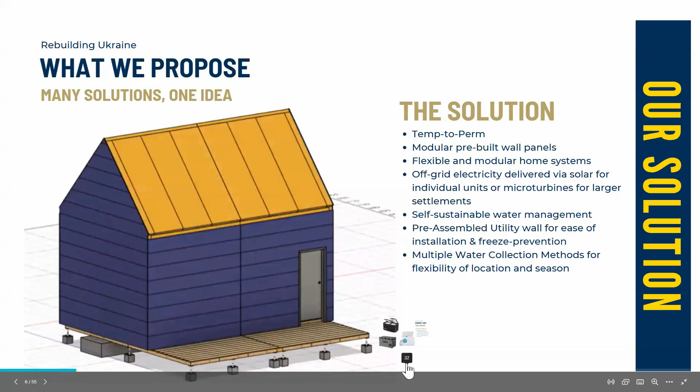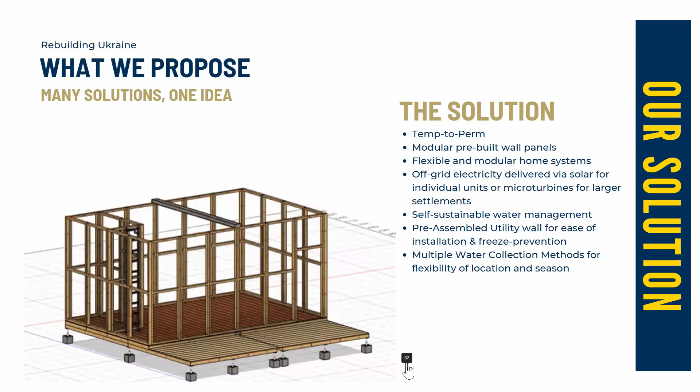My colleagues are going to take you through each of the sections, but this is the solution: something that's temp to perm, modular, pre-built with wall panels, flexible and modular home systems, off-grid electricity, self-sustainable water management, pre-assembled utility, and multiple water collection methods for flexibility of location and season.

So now my colleagues will take you through more detail, starting with Mr. Jeremy at Block Scale. It's an honor to be with you today. As Charlene said, my name is Jeremy Ward. I'm a Master's of City Planning student at Georgia Tech, and I'll be taking you through the block scale plan today.

As Frank has already said, we wanted to imagine what it would be like. We're presenting a template for a unit for Ukraine, but we wanted to imagine what it might be like to reconstruct neighborhoods, villages that might have been destroyed during this conflict, or might be new villages, looking at it from a more comprehensive viewpoint—not just individual housing units, but what the community might look like, how it fits into existing transportation networks, and some of the infrastructure we'll walk you through, including existing development patterns and other recommendations like micro combined heat and power.

As mentioned, these units are individual and self-sustaining, but there are certain efficiencies from clustering that are important to keep in mind in order to make these units cost effective and effective in terms of the social value they provide to the residents of Ukraine. Two of these efficiencies off the bat are the sense of community.

You can have one of these units in the middle of a field somewhere, and that's one of the alternatives we'd like to present, one of the options we'd like Ukrainians to have. But there are communal benefits to being in a village—this is the traditional pattern of human development and growth—and there are benefits from infrastructure. It can be cheaper to run a larger energy and wastewater system for multiple houses as opposed to just one, so we do recognize these efficiencies.

One key takeaway I have for the block scale plan is that one of the optimal configurations, especially for smaller units like the one we have, is a small inward-facing village, a pocket neighborhood. These types of developments are age old—this is the core medieval village pattern in much of Europe—and it's making a resurgence across much of the world, certainly here in the United States, but there have also been pocket neighborhood developments built in urban areas in places as different as Haiti and Hungary, and multiple parts of Africa in the past year.

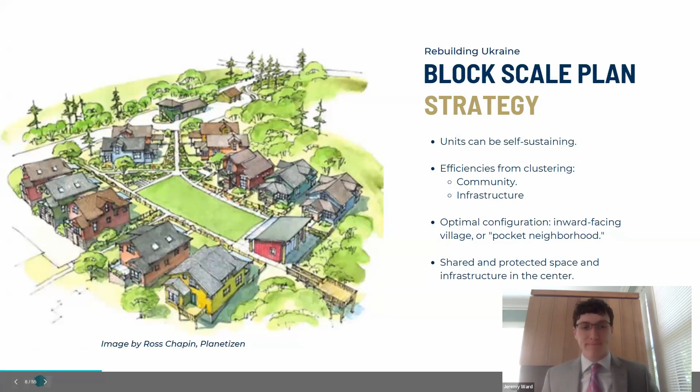However, it's also important for us to consider the existing patterns of development in Ukraine. These are different based on if we're looking at an urban or rural area. This is important to recognize and keep in mind.

One of the key rural patterns of development in Ukraine, in the smaller villages, the outskirts, the agricultural regions of the country, which is much of the country to be honest, is that most Ukrainian villages tend to group along the roadways. You can see in these two images taken from two different parts of Ukraine how the pattern is exactly the same: roads running through the village, houses fronting the road, and some shared space in between the roads, most prominently in the village on the right, where you have four roads and can see fields or gardens in the space between the houses.

So this does, in a way, mimic some of the qualities of pocket development we talked about earlier, having space between houses that can be viewed as more protected. But it's quite different in the sense that it's fronting the road, which can feel less secure, especially in a time of war or trouble. This is something our houses could do, following this traditional pattern if desired on the ground. It could also be slightly modified by putting a second row of units in between two roads, for instance, for people who preferred privacy or were worried about being right on a main road, given there's warfare going on.

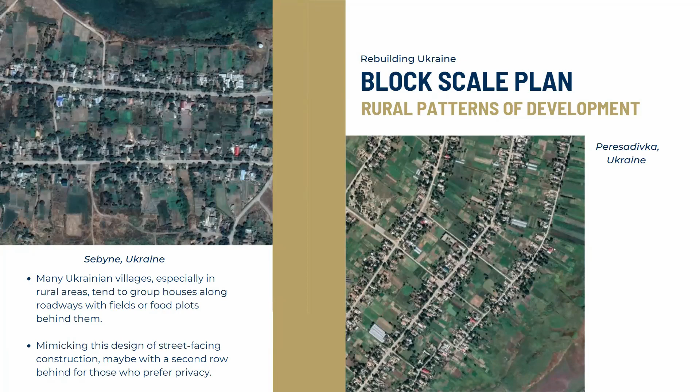So this pocket neighborhood, we would recommend for urban and suburban areas in Ukraine. The beauty of it is it's very versatile. It can work well as infill within an urban environment that may need redevelopment or may have been destroyed, but it can also work as a new neighborhood within a rural area. Based on feedback we've gotten from residents living in these sorts of developments, you can live in it and feel like it's an old place, somewhere with safety, familiarity, and comfort.

Because of the configuration, it has the feelings of protection, shared community space, garden infrastructure in the middle, and the simple fact that you're looking at your neighbors. So there's always eyes on that central area, people are always looking out for your house, you're not isolated. This is a very important consideration, especially given the warfare happening in Ukraine and the impact that takes on people's feelings of community, their opportunity for community.

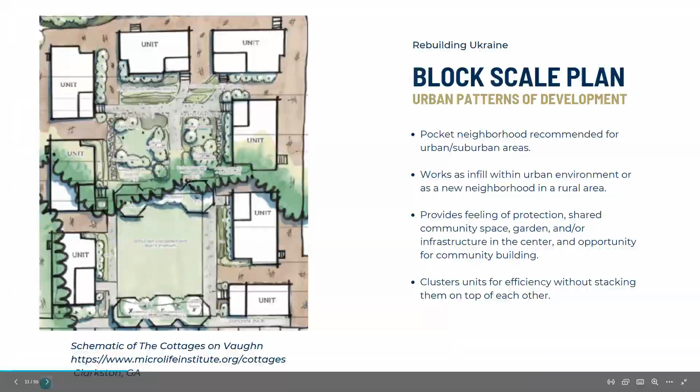Just providing a safe space, whether common or individual, for the cultivation of food near the home, protected from the weather and from people trying to come in. One other key consideration for the project is that these areas in the middle, the greens, are safe areas for children to play. We are not just building these houses for single families of adults or an individual adult, but want to acknowledge that many children and families have been displaced and may make use of these units. So these common areas, under adult supervision, are safe places for children to play.

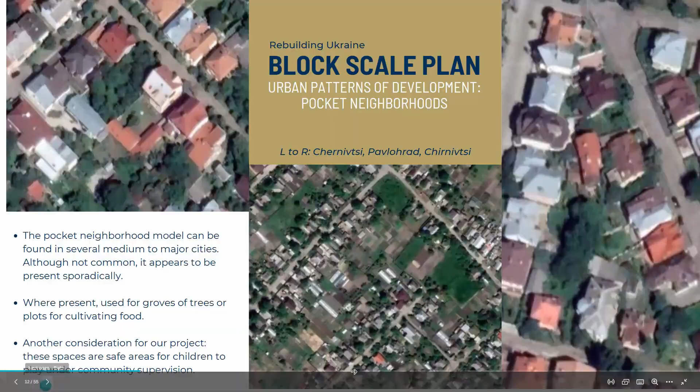And finally, one other key acknowledgement is that many Ukrainian neighborhoods, pretty much around the country, feature fencing in front. This might be for privacy or for security, but if Ukrainians on the ground would like to consider building a larger scale version of a neighborhood with our houses, with our units, it might be worth considering putting in a fence around the outside, because that does seem to be a priority for many Ukrainians.

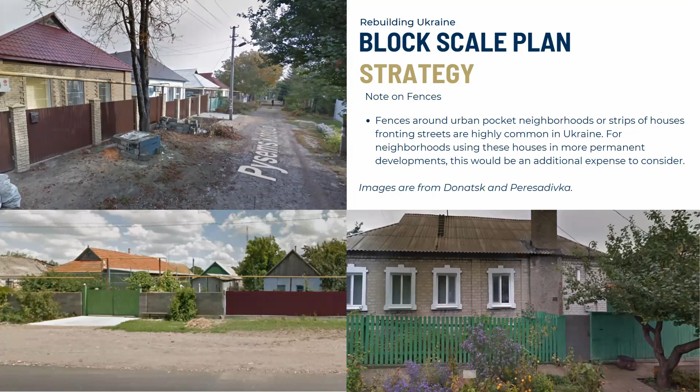I want to say you've really noticed some important things about how Ukrainians like to live, and the whole idea of being able to have gardens for food production. This is very much in the tradition—people who live in large cities all have dachas that they go to in the summer, primarily so they can grow their fruits and vegetables. So I think having that availability is really, really important, and I'm so glad it's part of your plan.

I appreciate that, I agree with you. This has been a priority for people in war-torn areas all over the world. That's a fundamental requirement for human life. We take it for granted here in America, but just the ability, the possibility for families to grow their own food and rely on that—that's a very important tool and a very important psychological feature that can make them feel at home and secure in their new home.

The other thing we've discussed previously is there seems to be a resurgence of people going back to the villages, as opposed to what we saw in the decades when people were going to urban areas for jobs. But now, because of safety issues and others, there's a resurgence of people wanting to go back to the village, so I think this would be very attractive. Thank you very much. Yes, ma'am.

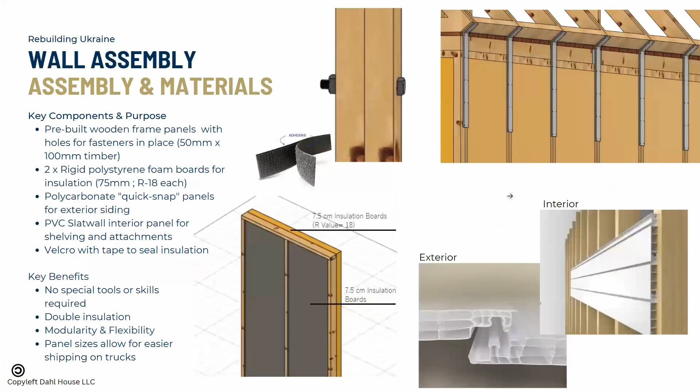The assembly and materials will be wood frame with 2 layers of polystyrene foam boards. Between the foam boards, siding, and interior panels, we're expecting an R value of about 35 to 39, to help combat the really cold winters in Ukraine. The exterior will be polycarbonate quick-snap panels for easy assembly, and the interior will have PVC slat walls, giving people the ability to hang things, covering the entire interior of the system.

The double insulation really helps not just with insulation, but the way they stick together on the outside with tape will also seal it, so it'll be a very tight envelope, which helps with efficiencies in terms of keeping the heat in.

The sizing of all these panels was designed so they could easily fit on the back of a truck, for delivery and moving, making it a lot easier. As you can see on the left, it will be shipped as 2 panels, so you can put the panels together and then put the insulation panels inside, and it'll all attach like that. The key was also scalability.

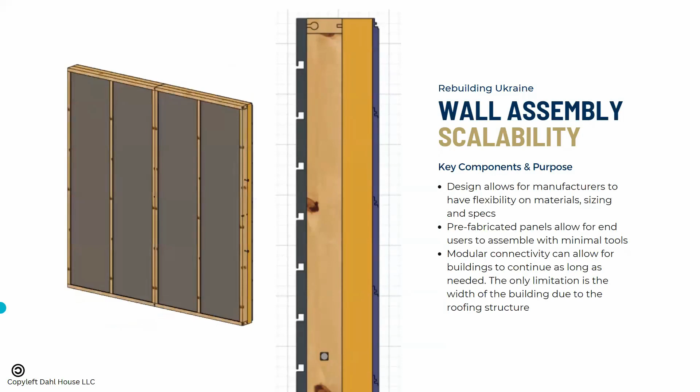The overall dimensions, the standard would be about 2 units, which will be 24 square meters on the main floor, giving you about a 3-meter high ceiling. It's actually a pretty high ceiling in there.

One key thing Vlad mentioned was that they usually have a deck, patio, or balcony where they store all their tools and stuff. He said the deck was basically his garage. So I wanted to make sure we incorporated some kind of deck so they had somewhere for an outdoor area without standing on the dirt.

The deck is about 2 meters wide by 6 meters, giving you a pretty decent amount of space outside. There's also a loft area that gives you about 12 square meters of usable space. So the overall usable space for a double unit would be about 36 square meters.

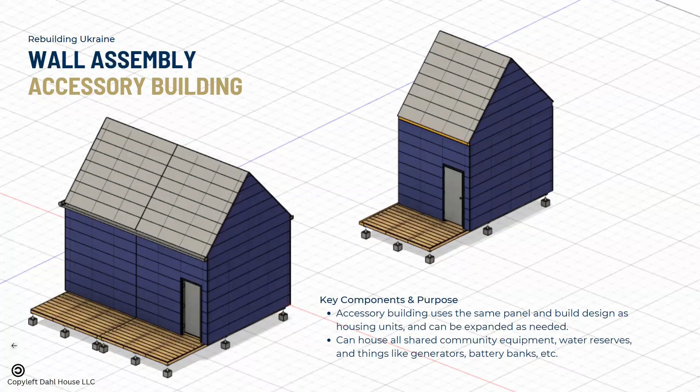As you'll hear later in this presentation, for all the systems we're suggesting, there will be an accessory building or utility building. This building will house things like the MCHP system for power and heat, for water heating. It'll also hold water storage and other utilities like batteries, which they'll discuss the power option for later with Nick and them. The accessory building will use the same design essentially as everything else, so you can make it bigger or smaller depending on whether you're planning a full block's worth of utilities or just a couple units.

So before I pass you off to Jennifer, Art, and Kelson with water and sewer, does anyone have any questions for wall assembly? This is Mike Burek.

I just wanted to point out there was one comment on the last presentation. Peter mentioned to everyone that with the trauma of war growing, growing food can also be very emotionally healing. Yes, I agree, and having that inside, I think, would be a much better feel and make it feel a lot more homey rather than kind of sitting in a box.

Derek, I had just one question. What was the thought on the polystyrene versus polyiso insulation, or something a little denser and higher performance?

It was more for the rigidity, I believe, and just getting basically pre-made rigid panels, because the panels on the exterior are basically a structural component, if you will. So that's kind of why I went in that route.

They look great. It might be helpful to do an example of how they can be reconfigured into almost anything else afterwards, how they can be incorporated into multifamily, or how the reuse doesn't require that they go back together into that same relief housing configuration.

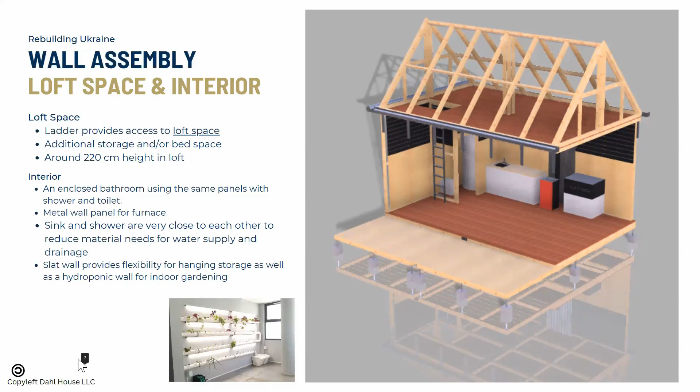Right, yeah, that's a great point. If you can tell, like from the deck, the way that -- if you could go to the slide with the dimensions, you can see it better. So the way the deck is, those panels come out, so you could actually expand the house out to the full length of the deck if needed, and remove the deck. The panel should still attach within that overall dimension. So yeah, there's a lot of modularity to it so they can go a little wider and a little longer.

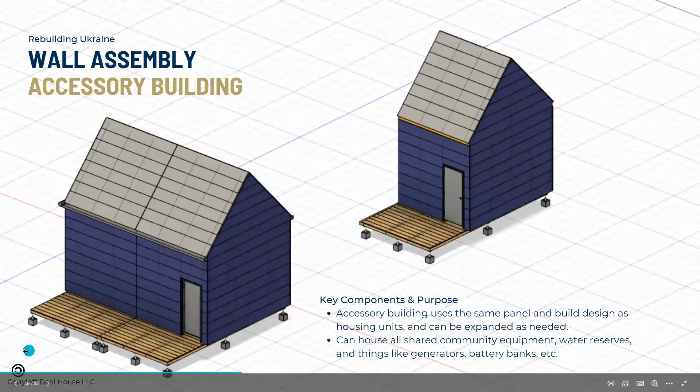Derek, this is Peter Michelson. Quick question about the siding on these units. So the images -- it looks like some kind of lap siding. Is that a fiber cement siding that goes over? No, if you go back to the material slide...

Yeah, right there. It is a polycarbonate, basically a plastic. You can kind of see that one picture on the bottom that shows the exterior, how they snap together. Oh, so those -- okay, I thought those were a vertical alignment. That's a horizontal alignment, yes.

They snap together. And another intent of the wall panels that Derek designed is that they could be assembled by non-skilled labor. So we thought it was important to create a wall assembly -- Derek designed a wall assembly that could be assembled easily. The panels go together quite easily, the siding snaps together quite easily. So it's really meant to be sort of a Lego approach.

So that image up there, Frank, that's like a through bolt that connects panel to panel? Yes, there'll be about 4 bolts per side of each panel, then 3 on the bottom and 3 on the top. So just IKEA tools put it together? Yep, basically you could do the entire house with just a drill and a couple of wrenches.

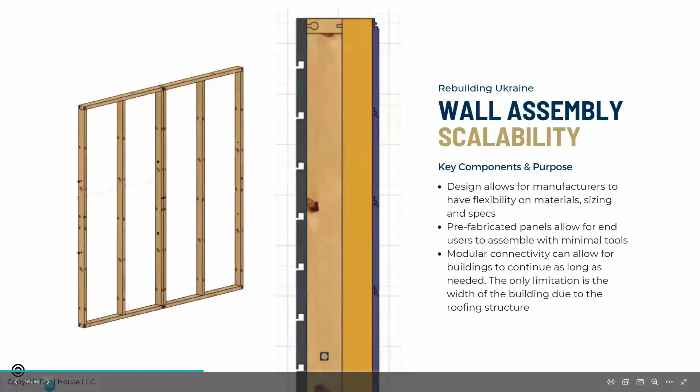Looks like you've got a very interesting eave detail. Also, in one of the other pictures it looked like there was some kind of gutter system incorporated. Yes, there's a gutter system for water collection, I believe it's on the first slide. Yeah, you can kind of see the gutter system goes along the side and meets in the middle.

So the options that will be discussed by Jennifer and her team for water collection will kind of cover where that will end up going. So it'll either end up in a system that's going to be stored there or in one of the accessory buildings.

Would those gutters interfere with ice and snow sliding off in the winter, or I guess you could put some gutter guards on them or something like that? They're actually going to discuss a possible solution for that as well later on, but I believe there's some heating system for the roof. The cool eave detail, I like that.

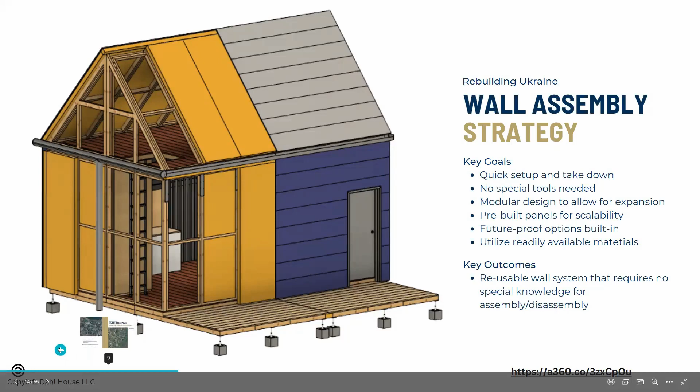Derek, what's the plan for windows? Currently we kind of avoided the window approach for now, just in terms of doing it as quick as possible and having as tight of an envelope as possible. But because it's essentially rigid foam, it would be very simple to just cut through that and add windows as needed.

Yeah, our primary goal, Peter, was heating. And the unit, while it could serve temporary purposes, could evolve as the structure -- it could be disassembled and removed, or windows could be added, it could be clad with brick or stone later. So it serves its purpose and would do so for many years, or it could serve as temporary housing. The concept is temporary to perm, and that's why we considered how these would assemble in terms of community as well.

And for the layman who's assembling it, adding windows is a pretty complex install to make sure the water runs the right way and that there's no leakage. So we're kind of trying to foolproof it. So let me just, I guess, maybe challenge you all.

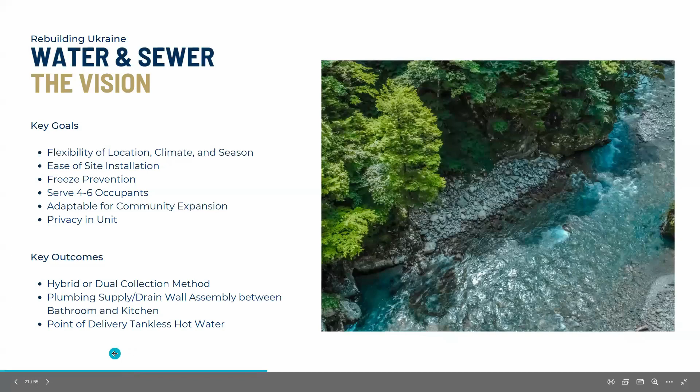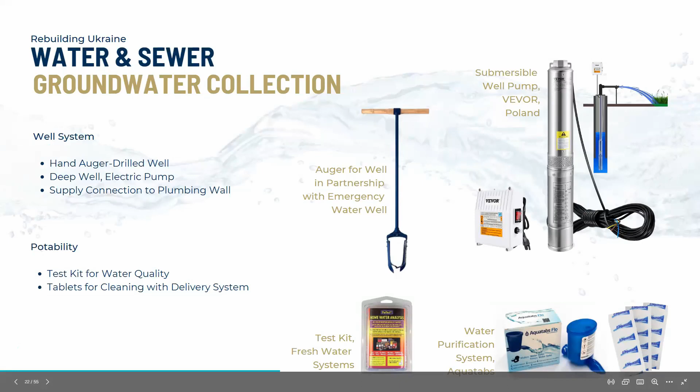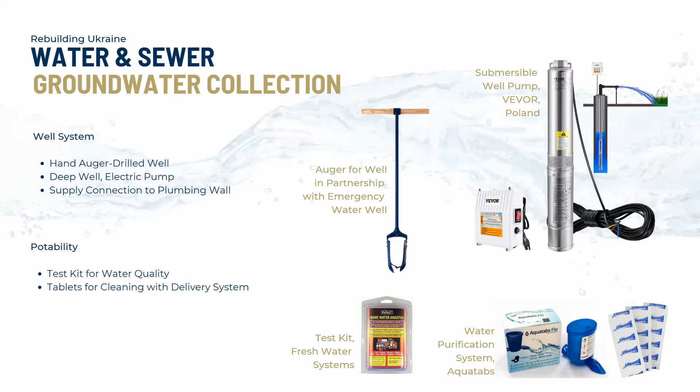And now Jennifer will take us on to the next part of our presentation. Thank you, Art. As we all know, water is a precious resource vital for human survival, especially vital for the survival and prosperity of the people of Ukraine. The ideal scenario would be to connect the cabin unit to a clean municipal water source, as Art mentioned. Our dual hybrid collection method seeks to take advantage of natural resources in a sustainable way for both the individual cabin units and the community at large, with or without the availability of a clean municipal water source.

We focused on creating a temporary to permanent solution for those who are fleeing the war. In our research, we learned that Ukraine is abundant in river basins, so we decided groundwater should be an important component of our water supply solution. We sought to find potential partnerships with subject matter experts, manufacturers, and wholesalers, preferably in the region, for central assembly of the cabin unit, flat packed like Derek mentioned, and crated for site delivery.

So our first goal was to look at the groundwater. We developed a well system using an auger for the well in partnership with the Emergency Water Well. We looked at a deep well electric pump from a wholesaler called VEVOR, that has a warehouse in Poland. And then, as Art mentioned, a quick supply connection to the pre-assembled plumbing wall to make it easy for those fleeing the war to install this cabin unit.

In our solution, groundwater will supply water to the cabin unit for drinking, hygiene, cooking, washing dishes, and clothing. We want to provide a way for the cabin inhabitants to both test and clean their groundwater within the cabin unit should the test kit prove there are some issues with it. So we looked at this test kit for water quality that could be included in the flat pack, and these tablets for cleaning from Aquatabs with a delivery system that would fit within the piping in the unit. Even though groundwater is a valuable and abundant resource in Ukraine, we wanted our solution to take it a step further.

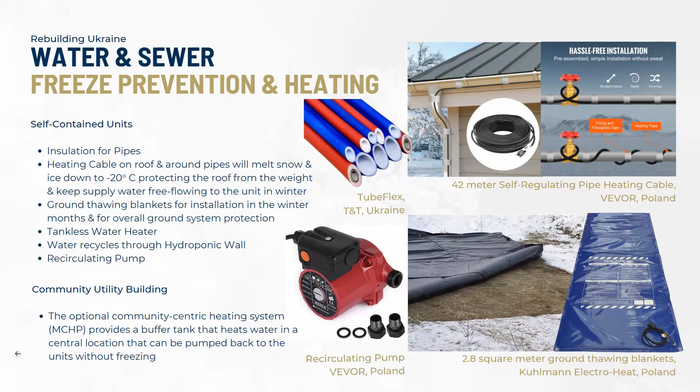Ukraine experiences long, cold winters where temperatures often drop below freezing. Freezing temperatures can cause water to freeze, which could lead to burst pipes, damage to the water system or the cabin unit, and interruptions to the water supply. So in our solution, we proposed insulation for the piping and a heating cable on the roof around the pipes, which will melt snow and ice to keep those gutters flowing.

That heating cable works down to 20 degrees below 0 Celsius, and it would also protect the roof structure and wall assembly from the weight of the snow and ice, keeping the water supply free flowing to the hydroponic wall in the winter.

We also propose ground thawing blankets from Kuhlmann Electro-Heat in Poland, which would enable ease of installation should this crate be shipped in a cold month—they can put that down to help with the well digging. It can also be left there for overall ground system protection.

We also have a tankless water heater, as mentioned, in the unit near the shower and the kitchen sink. We're also proposing a recirculating pump to keep the water moving, recycling through that hydroponic wall.

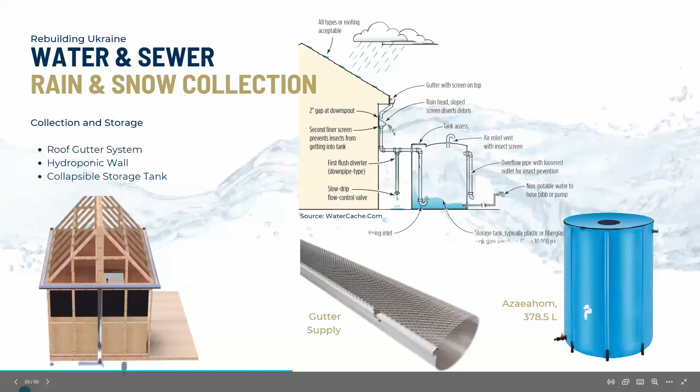The other option, shy of a municipal water source or using these options, is a community-centric heating system like the micro combined heat and power. That has a buffer tank that will also use the excess thermal energy to heat the water, where it can be pumped back to the units without freezing.

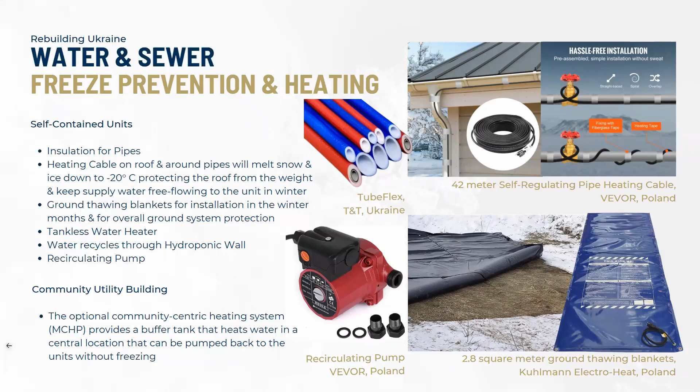By taking these steps, we hope to protect the roof from the weight of the snow, ensure year-round water supply, and prevent water from freezing, ensuring a reliable water supply even during the coldest months of the year in Ukraine. I'm going to pass it back to Art now, who will summarize our system and discuss additional suppliers for the cabin unit.

As far as water distribution, the plumbing system will have the capacity to collect fresh water for storage for immediate and future use. The plumbing lines will run strategically between the kitchen and bathroom wall, placing it between two spaces inside the dwelling that need the water.

We also suggest that the gray water that runs from the drain lines can be used for garden irrigation. Now I'd like to go into some of the suppliers we found through our research.

We selected several vendors that could possibly supply materials located in the vicinity of Ukraine. T&T, located in Ukraine, can be a source for plumbing lines and plumbing materials. There's another company by the name of Dafi, located in Poland, which can supply the point of delivery tankless water heater.

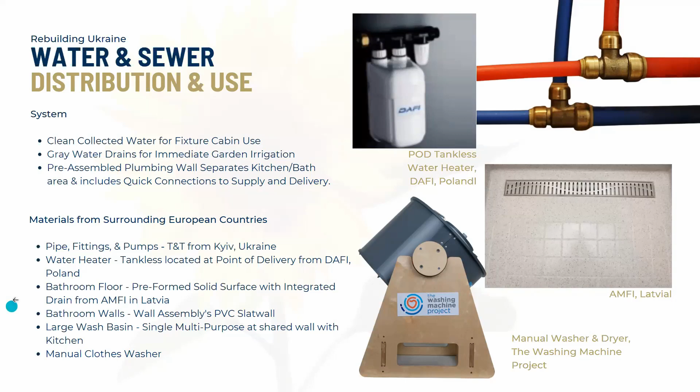Now Kelson will take us forward into his sewer system. Thanks, Art. So as said earlier, ideally we would like to connect to local utilities and sewer. In that case, we would just run a small electric pump to pump out all the waste.

The wastewater is emptied into a bag that can collect up to 30 flushes, both dry and liquid waste. These bags can be easily disposed of off-site, and are cheap and available in innumerable ways. The toilet can be either wall mounted or a standalone unit. It is a 12-volt unit that requires no electricity when not plugged in.

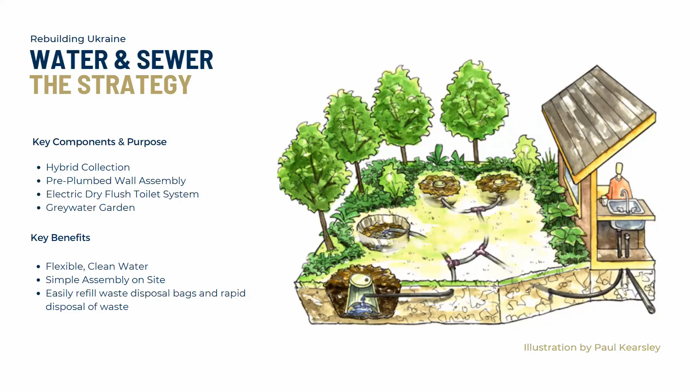Yes, if there are chemicals present, an easy way of solving this is using something like black charcoal as an inert, not an active purifying agent. Something like you would see in a life straw that uses black charcoal as a way to get rid of the chemicals, so that when the water is deposited into our garden, it is free of those presumably dish washing cleaning agents. That's something that gets installed after the particulate matter is strained out, and it has to be accessible for being changed out.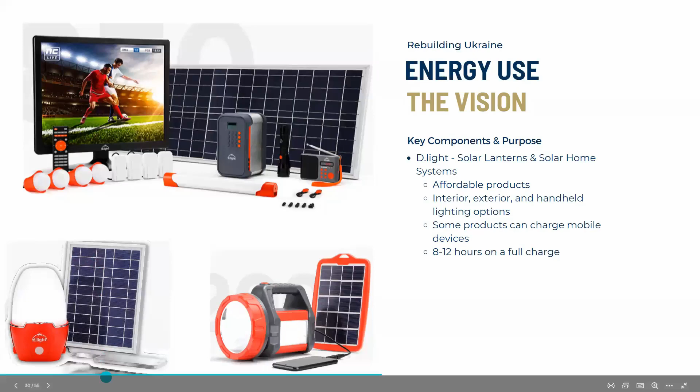The next lighting options are manufactured by a company called Colite Technologies, which mostly provides off-grid lighting for walkways, roadways, and parking lots powered by renewable energy. As you can see in the photo, the light can be powered by both a wind turbine and a solar panel. There's a lithium battery in the base of the light that captures the energy from the wind turbine and solar panel. All you need to do to install these is dig a hole deep enough to stabilize the pole. The poles come in both 12 and 30-foot height options, and they're motion sensored to help with energy use.

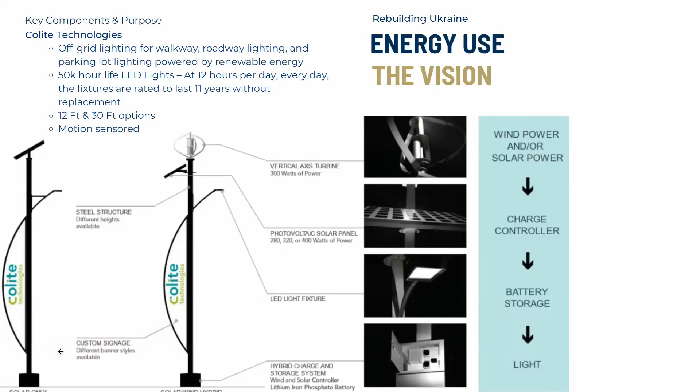The last part of energy use I'd like to talk about is refrigerator and freezer options. We wanted to find something portable and dual zone, meaning a zone that could cool to refrigerator temperatures and a zone that could cool to freezing temperatures, coming in a variety of storage capacity options depending on how many people are living in each home. The options here come in sizes from 45 to 90 liter storage capacity. The white option is powered by propane only, and the other two can be charged from a car, truck, standard wall socket, or a power bank. All these options are weatherproof and durable, so you can leave them inside or outside the house, and they cool anywhere from -18 to 10 degrees Celsius.

Now I'll hand it over to Nick to speak about energy production.

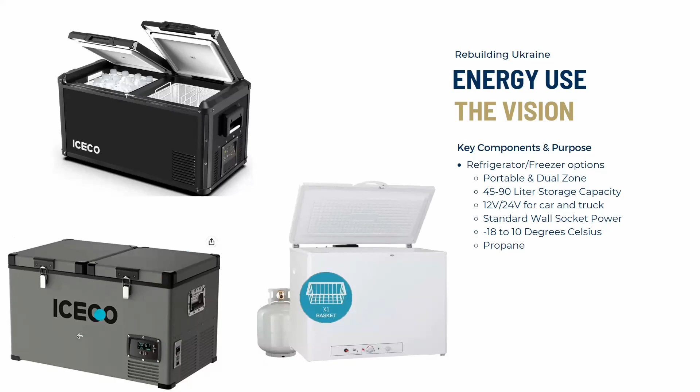Thanks, Jared. It was extremely fulfilling to be a part of this solution, and I echo all my colleagues in hoping our small contribution makes an impact on the ground in Ukraine.

Looking more closely at energy production and producing energy to power these homes, our goal is flexibility and adaptability based on location, spanning the spectrum from rural to suburban to urban. Our goal is for fuel and energy to be readily available, so malleability is key. We understand that geographic deployment creates a spectrum of possible needs, and sustainability is ideal, but petroleum-derived products are often available on the ground.

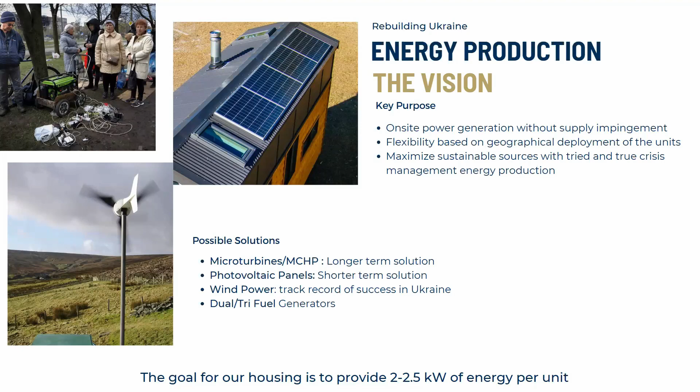Digging into the possible solutions we considered, micro-combined heat and power systems are a suggested long-term solution. Solar panels work really well for individual units in the short term. Wind has a track record of success in Ukraine, but it's not always readily available and requires battery storage. Generators are obviously one of the primary uses on the ground today - not going to touch on that too much since it's pretty well covered technology. Our overall goal is to provide 2 to 2.5 kilowatts of energy per unit, which should be ample for the 24 square meter units.

Picking up on feedback from Nadia and Scott on our first presentation, we wanted to ask: is the centralized grid truly the long-term answer, considering the potential for long-lasting conflict and the goal of rebuilding deeper energy resiliency in Ukraine? Or is a distributed, district-focused application more in line with long-term goals for permanent impact to the way energy is produced in Ukraine?

We believe so. Via cogeneration, these units strike two birds with one stone by leveraging the heat produced in the creation of electricity to heat water and even spaces. Via the accessory dwelling that Derek mentioned earlier, and with a well thought out planned layout of housing as Jeremy touched on, the heat generated can be distributed hyperlocally via insulated ductwork. This MCHP can function off a number of different fuels including biofuels, natural gas, propane, kerosene, and a number of other uses as well.

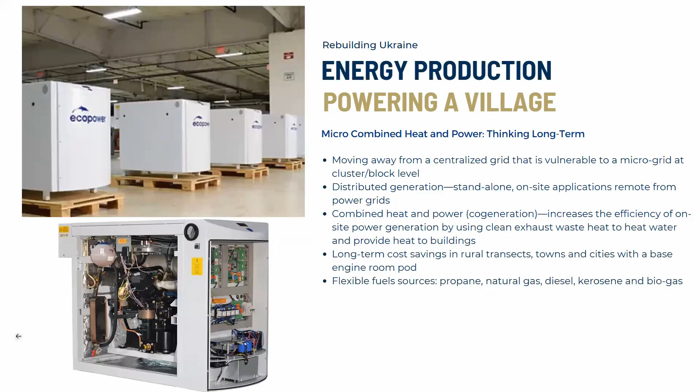So looking in more detail at this technology and how it works, comparing it to a centralized grid, we want to emphasize that this is a well understood technology that has been used for 40 plus years, and the machines have an extremely extended lifespan.

Looking locally here in Atlanta, larger versions of this technology are used at one of the largest urban brownfield redevelopments in the nation. That's Atlantic Station, about 140 acres, 5,000 residences, and a total of about 6 million square feet of development. They created their own energy district, viewed as sustainable due to the reduced carbon footprint and cost to run and maintain.

We want to continue to emphasize that this technology is understood and used in applications globally, as well as within Ukraine.

Looking to slide left, you can see that conventional power is only about 30 to 40% efficient due to the average distance of transmission. So there's a large spread that exists to implement a more efficient source of power in fuel supply pipe constrained environments.

If your energy source is under attack, efficiency is crucial, and you need to maximize what you're able to get your hands on. Looking at the middle of the slide, you can see that due to its district energy implementation, CHP is about 90% efficient. You're not losing energy in transmission to homes that are miles and miles away.

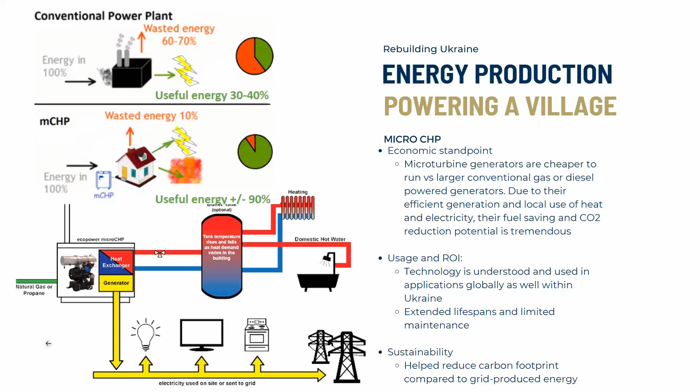Looking at accessibility, Ukraine has actually already invested in this technology in certain regions. There's a total of 6.1 gigawatts in capacity installed. It looks like at least 50% of that has actually been destroyed in the past 2 years. And in 2021, CHP represented about 5.5% of power generated in all of Ukraine.

Mykolaiv, a strategic city on the Black Sea that was invaded and later retaken, has a combined heat and power plant that produces heat to the local citizenry. It supplies electricity that's co-produced with this heat, and also provides wholesale electricity to the entire market of Ukraine. Prior to the invasion, it serviced about 40,000 citizens in a city of about 500,000. So you can see there's significant capacity to expand this technology within Ukraine, and there's likely already interest.

The great thing about this is MCHP systems can be delivered within continental Europe, and Netherlands is an industry leader. Spain has a few companies that focus on this technology, so it can be delivered over land quite easily. Each unit at the micro level is about the size of a very large refrigerator or deep freezer and weighs about 800 pounds.

Bringing it back to the economic side, the cost and impact: essentially a 60 kilowatt machine, which is what we are looking at for a 25 to 30 unit village, comes in at a cost of about 120,000 to 150,000 US dollars. That's 4.5 to 5.5 million in local currency, which comes out to about 73,000 to 91,000 per kilowatt in local currency.

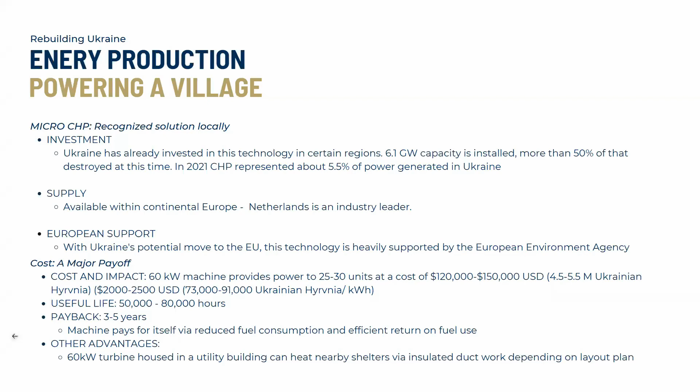So that's really our general suggestion when it comes to thinking long-term and thinking permanent, and also thinking of a larger implementation. But thinking a little bit more about some of the other sustainable solutions I mentioned.

Solar is feasible, and there is some significant installed capacity in Ukraine, but there is geographic variation in its effectiveness, and obviously it requires batteries and storage.

Wind is really geared more towards a long-term static use, and when you're thinking about it from a temporary to a permanent perspective, wind turbines really don't hit the goal.

There is a local Ukrainian firm, Ecotechnic, that produces 2.5 to 6 kilowatt solar systems, including a battery as well as the panels. Jackery, one of the most well-known off-grid battery systems, has solar attachments, and its battery system is considered quite unique and strong. It's available and sold in Ukraine.

And again, wind systems are really less reliable on a large scale, and taking on a large wind infrastructure for 30 or 100 units doesn't make a ton of sense.

Looking at the Ukrainian Minister of Energy, he said that they've lost about 90% of wind and 45 to 50% of their solar. He also made the point that the larger sustainable sites are easily identifiable and targeted. Green energy is probably the most affected sector within Ukraine.

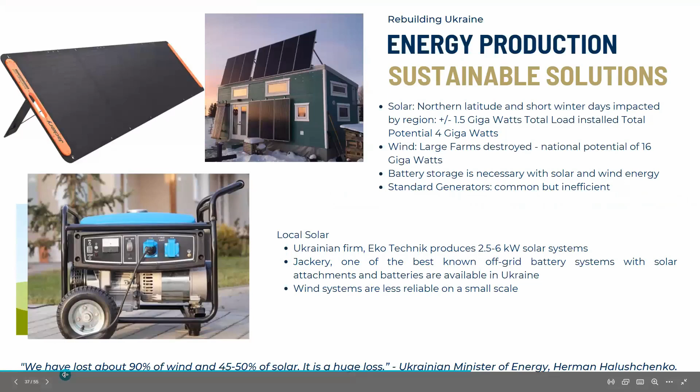So just looking at solar versus MCHP per 25 home village, solar is about 62,500 USD, geared more towards short-term crisis use. MCHP is going to be about double that, but the focus there is that this has a 10-year lifespan, can be put on the back of a pickup truck and relocated, or even added to going forward when it comes to creating larger villages or larger energy districts for power.

Thank you guys. I'm going to hand it over to Marwan and Nandini for heating, ventilation, and air. But before that, are there any questions on energy use or energy production?

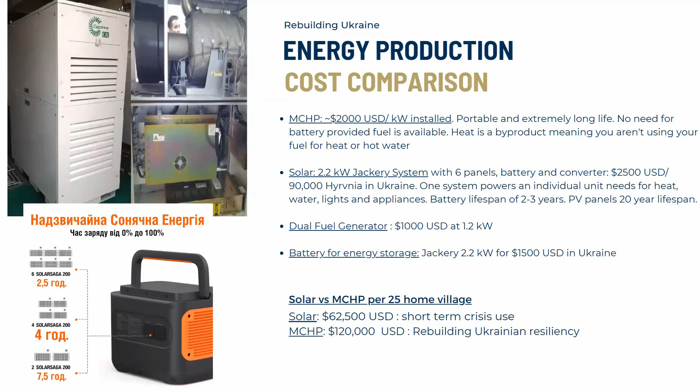Yeah, I have a question. You are talking about wind. Traditionally there were a lot of villages where there were windmills for individual homes. Is that not an option?

The issue with wind is the wind has to be blowing, and it also requires a pretty robust storage system. So your costs really start to go up when you look at actually buying the battery and installing the wind system and maintaining it. So short-term, we felt that solar was definitely the way to go. And then long-term, the MCHP solution really provided a lot more bang for your buck in terms of utilizing fuel.

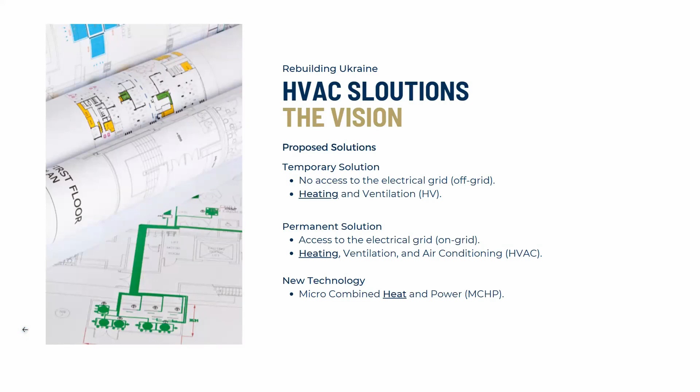So in this case, we offered a full HVAC solution. Regarding new technology, we thought it would be great to share a new idea which can help increase the efficiency of your power grid system, and can be easily implemented while rebuilding Ukraine. As you can see, the most common thing between all our solutions is heating, because of the location of the project. Nandini will discuss in the following slide why we thought heating is very essential for this project.

So as Marwan talked about, we're focusing on heating for off-grid solutions. And when we're not in touch with electricity, we're going to use biomass fuel. So let's talk about why heating is important for Ukraine.

The first is winter climate, because Ukraine experiences such cold winters with temperatures that drop below freezing. Without proper heating sources, people will be exposed to the harsh weather.

The second is energy dependency, because Ukraine heavily relies on energy imports from Russia, which creates significant risk. Developing domestic heating sources becomes extremely important because this would reduce Ukraine's dependence on Russian energy and enhance energy security.

We have economic development related to heating importance, because developing domestic heating sources will reduce energy costs for Ukrainians. The fourth is environmental concerns, because Ukraine's reliance on fossil fuels for heating creates significant environmental concerns. Developing alternative heating sources will promote sustainable development.

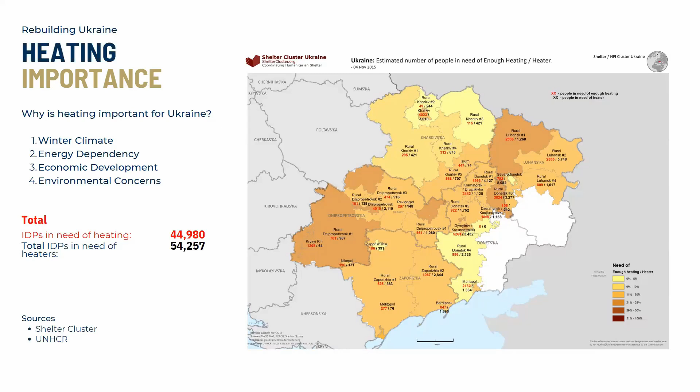We know Ukraine has its own standard for heating load estimations, but we couldn't find any of these standards in English. So we decided to use our own American standard, called ASHRAE. We provided a link for the Excel file which was created and used for this project. This Excel file can be used as a calculator for the heating load. Please feel free to use it and update it with the most accurate values.

Because of the many unknowns we have for this project, you will find many assumptions have been made in the calculations, and we provide a reasonable explanation for each assumption in this Excel sheet.

One of these assumptions was the location of the project. We assumed, just for the sake of the calculations, that the project will be in Western Ukraine, in Lviv. Please don't misunderstand our assumption; we are not limiting our project to be in Lviv or even in Western Ukraine. Our project can be built in any part of Ukraine.

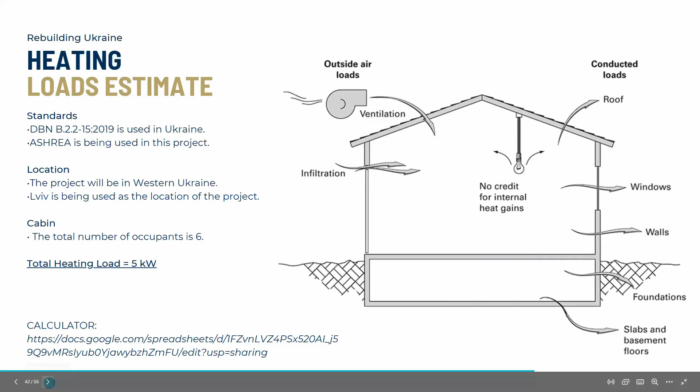Based on our calculations and assumptions, we found that the maximum heat load required to heat our project in the worst winter condition is around 5 kilowatts. Then Nandini will discuss in the following slides our proposed solution to efficiently provide the desired heating loads.

So as we are going into biomass fuel, we decided to look into pellet stoves as well as wooden stoves. We tried to research what exactly is the difference between these two. Basically, a wood stove burns wood logs, which are readily available in Ukraine and can be really inexpensive.

But there are some disadvantages to this, which is that burning wood can release pollutants in the air and negatively impact air quality, as well as affect the availability of trees for firewood, which can be done in an unsustainable manner if not regulated.

The second is the pellet stove. A pellet stove is basically a stove that burns compressed wood pellets, made from sawdust and other wood waste products. Pellets are typically more expensive than firewood, but they burn more efficiently and produce fewer harmful emissions. However, pellets are a renewable resource, but their availability in Ukraine is limited.

So for energy source, wood stoves do not require any electricity to operate, while pellet stoves do, which makes wood stoves an ideal backup heating source, and thus can be preferred in areas with less access to electricity.

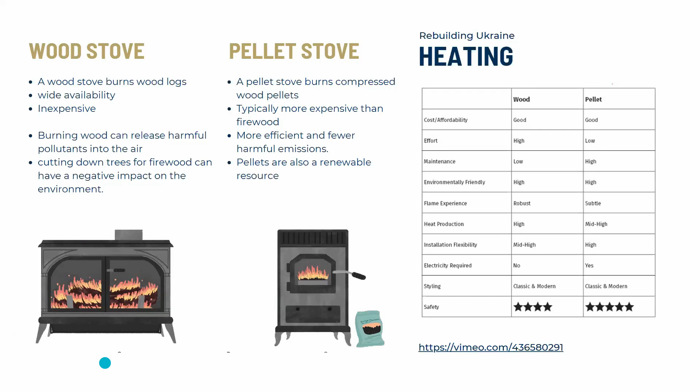For the wood stove, we looked into a company called Stove Fitters. It is based in the UK, and one of the wood stoves they provide actually has an option of keeping a stovetop on top for cooking purposes, for light cooking.

The material used in the stove is cast iron, and it produces a heat output of 5 kilowatts, which is accurate for the calculation.

It also has the availability of back and top fixing chimney options, and comes with a vertical shelf below the stove for storage of wood.

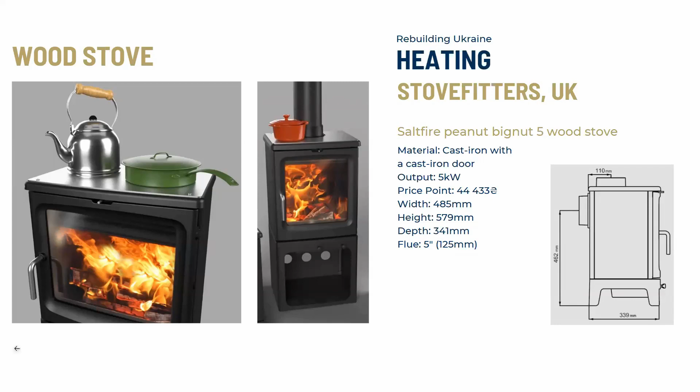For the pellet stove, we looked into a company called Solo Stove. Solo Stove is based in the United States, and they have paired up with World Vision.

World Vision is a humanitarian organization currently engaged in responding with assistance in Ukraine, Romania, as well as Moldova. These camp stoves from Solo Stove will be shipped to World Vision.

World Vision will further deliver it to different refugee stations bordering Ukraine. The stove they are planning to ship to Ukraine is the Titan Camp stove. This is a suitable pellet stove for a place where portability is essential. It is large enough to cook a meal, make coffee, or even boil water.

And it can give sufficient radiant heat when in an enclosed space.

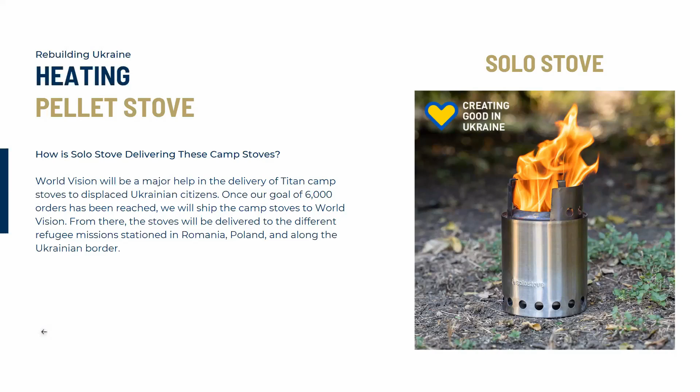Apart from the stove, the company also sells wooden pellets. Wooden pellets are basically biofuels made from compressed wood fiber. The advantages of using these are clean burning, they produce high heat, and they are eco-friendly.

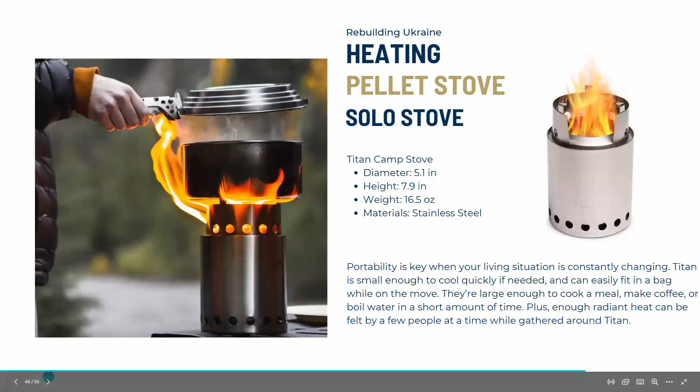Can you, one more, please. So thank you so much, Nandini.

Regarding our ventilation system, we made sure that all our devices are available in Ukraine because of the necessity of the ventilation, as mentioned before.

We will be using a carbon monoxide smoke detector to keep monitoring the CO level inside the cabin, because it can be very dangerous if the CO concentration becomes higher than 100 ppm.

Also, we will be using a wall-mounted fan to keep recirculating the air inside the cabin. Recirculating the air will help to have a uniform temperature distribution.

Finally, we will be using 2 exhaust fans to keep mixing the air inside the cabin with the outside air. Mixing the air will keep providing the cabin with fresh air.

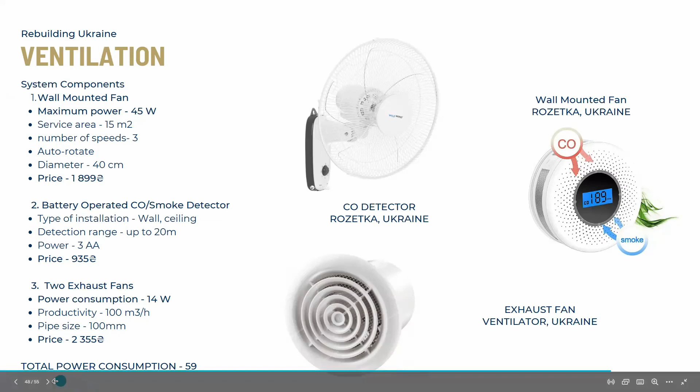So that was our first solution. Our second solution will be the permanent solution. In this case, the project will have access to a power grid source, so power consumption won't be a challenge. We recommend having a full HVAC system.

A mini split system will be ideal for our project, as this system can provide heating and cooling. We recommend using a console split system because it's very easy to install and it doesn't need to be hung on the wall.

As you can see in the figure on the right, this system operates on a wide range.

Its cooling mode can work when the external temperature is as low as -15 Celsius and as high as 43 Celsius. The heating mode can work when the external temperature is as low as -22 Celsius and as high as 24 Celsius.

As you can see on the figure on the left, this system consists of 2 components.

One would be outside the cabin, which has the Gree logo on it, and the other will be inside the cabin. In the cooling mode, the unit inside the cabin will remove the heat from the cabin and drop it outside using the external unit.

In the heating mode, the cycle will be reversed. What I mean by reversing the cycle is reversing the flow direction of the refrigerant inside the system using valves.

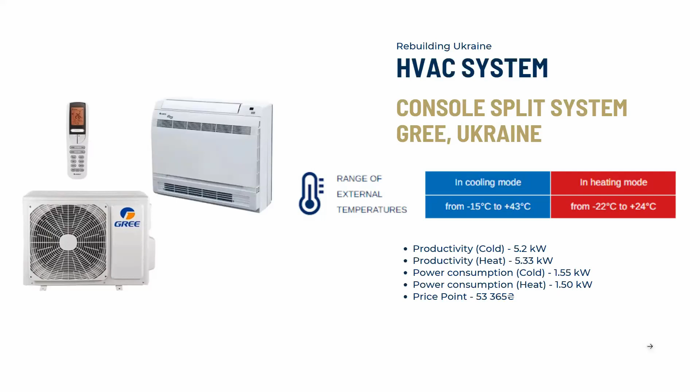Reversing the direction of the refrigerant will allow the external unit to work as a heat pump and remove the heat from outside and drop it inside the cabin.

Finally, we will talk about the proposed new technology, which had been mentioned before in this presentation: the micro combined heat and power system. This technology can offer power and provide heat at the same time.

It is exactly like a small power plant using a cogeneration cycle. This technology uses natural gas or propane to run the heat engine.

The primary objective of the heat engine is to generate power, but while running the engine, we have a secondary product, which is heat. As you can see on the left figure, this generated heat can be used to heat water via the built-in heat exchanger inside the device.

This heated water can be saved in a buffer tank for heat storage. This system and the buffer tank will be stored in the proposed accessory building. This hot water can be used as a source of needed hot water for each cabin, and also as a heating source by using a hydronic radiator. As you can see in the figure, we will need a big radiator to provide the required heat, around 5 kilowatts.

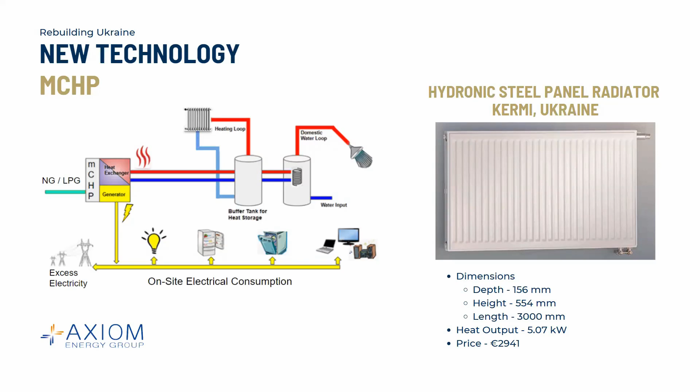Before I hand the slides to Frank, I will pause for your questions, or at this point any questions in general. We'll leave an email address along with the presentation and a hard copy, should questions come up after our delivery.

To reiterate, that's the magic of the micro turbine: the waste product is hot water, which could be pumped and stored into a traditional water heater, pumped and used as hot water, and or used in a traditional radiator as you see here.

So micro turbine and block-scale development is sort of the next thing to consider. When a society is forced to redevelop, there's always that opportunity for innovation and improvement, which can translate to a more sustainable community, a better sense of community, and a more resilient community. At the end of the day, that will be the opportunity Ukraine has when this conflict is behind them.

Frank, this is Mike. There was a question earlier from Jennifer Butler going back to the wall panels. She asks, could several layers of plexiglass have enough strength to hold a panel together instead of insulation, sandwich boards, and siding, without compromising overall structure?

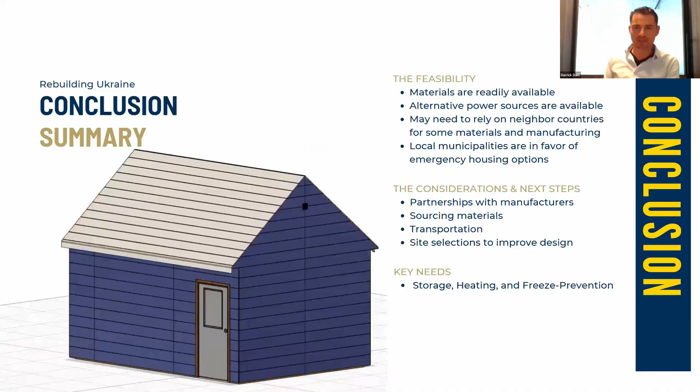Derrick, do you want to take a first whack at that? It should definitely have the structural integrity to do it. My only concern would be the siding. On the image I have for the materials, it's clear, but the siding we were planning on using wouldn't be clear, because that would give it a cheaper feel, almost like a greenhouse.

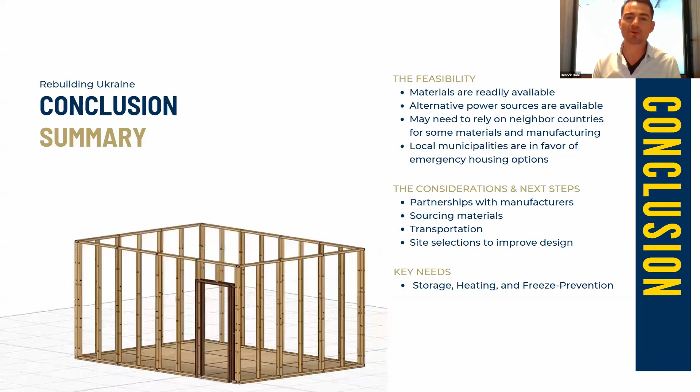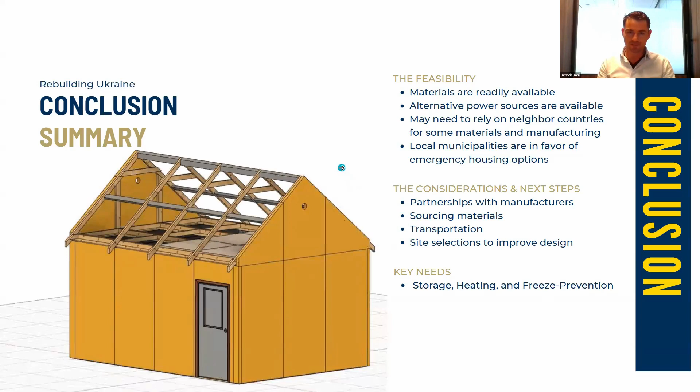So it wouldn't be as transparent as you think. You would actually have to cut into that siding to add an opening for the light to come through. And plexiglass really isn't a structural element either. It's quite brittle, and while it's not as dangerous as glass, it will still shatter.

It could be a solution for a window that's fabricated on site, that could be assembled as a window in the wall cavity.

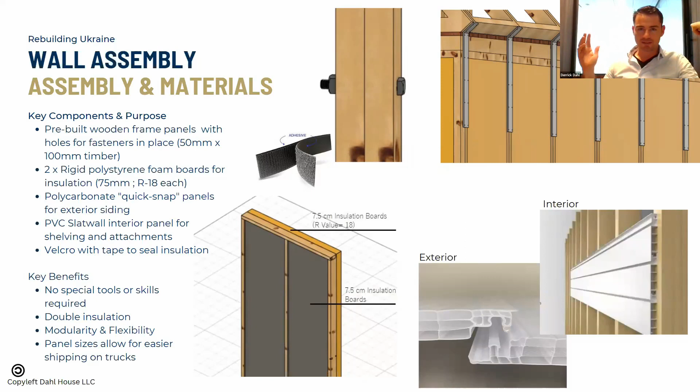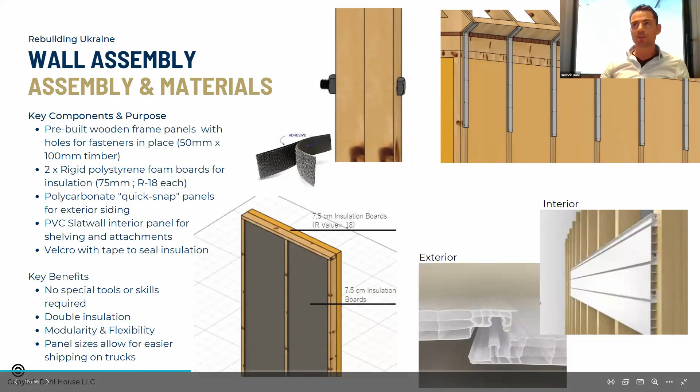So I think a solution would be to basically create some kind of window panel that can be installed — we can send that with the order, two windows per unit that will fit perfectly in that slot. It'll be wide enough to incorporate the fact that the insulation makes the walls pretty wide, so a standard window frame won't actually fit, it'll be too thin. So basically some kind of pre-built window system that could be put into that unit would be the optimal solution.

Frank, that's all the questions I see in chat.

Thank you, Mike. Well, I asked the class to consider themselves consultants to the U.S.-Ukraine Foundation. This is bigger than a class project or case study, and they took that request to heart, as you might see. They took a deep dive, and while I offered guidance, what you see here today is a result of the class's hard work and investment toward a cause they believe in deeply. I'm proud of them, and know that they are all very happy to contribute. We hope the information delivered might prove to be a viable solution.

Did I miss a discussion about costs? What kind of range are we thinking about? I mean, I know you've got so many variables.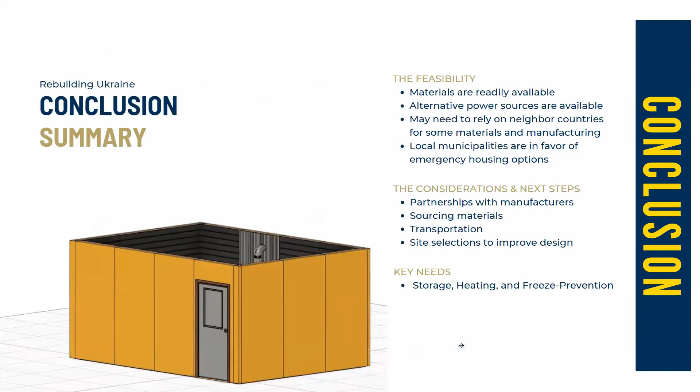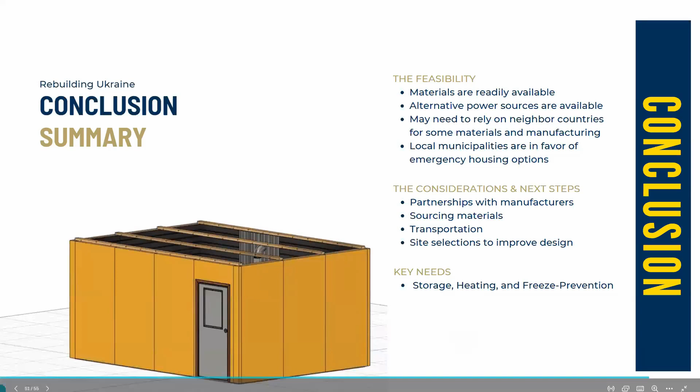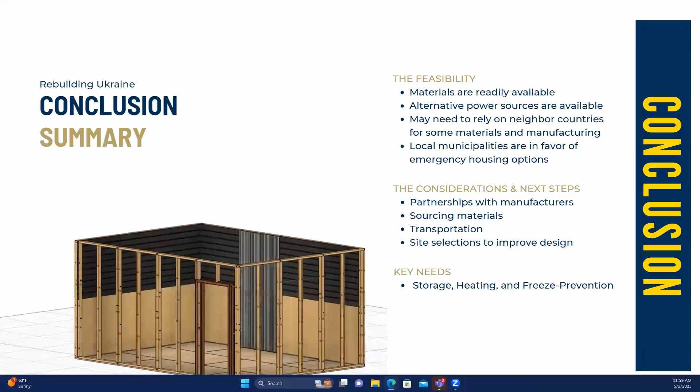There are a lot of variables, and while budget is always a consideration in this class, it usually partners with a nonprofit focused on affordable or low-income housing, trying to accomplish a build for someone living at 60 to 80% of US average median income. We had less emphasis on budget here, finding viable components that weren't outrageously priced, especially for energy production. Shipping, workforce, and material costs were too much of a wild card, so we didn't factor in cost. We focused on what is fast and viable more than cost effective, but that could be a next step.

We'd be happy to. Yeah, I think so. It was very interesting that you included your interaction with Vlad at the very beginning.

Building on that, as Frank and I have discussed, we've been working with Ukraine cities since 1997. I think we should look at having some focus groups, maybe with some mayors, to get additional input. I'm very committed to using all this hard work to move the needle on Ukraine choosing more immediate solutions for recovery. I look forward to continuing this work and showcasing what's been done.

And yes, we need to do windows. You were talking about houses facing the green area so children can play. Having windows where you could look out, I think, would add to the quality of life. There will be a lot of tweaks we'll think about as we have further discussions with people in Ukraine.

So another simple solution for windows would be to put in a glass door, giving at least one big point of natural light. Like the other components, we'll find a prefabricated window that fits within the rough openings of the unit and add it as another component to the wall assembly.